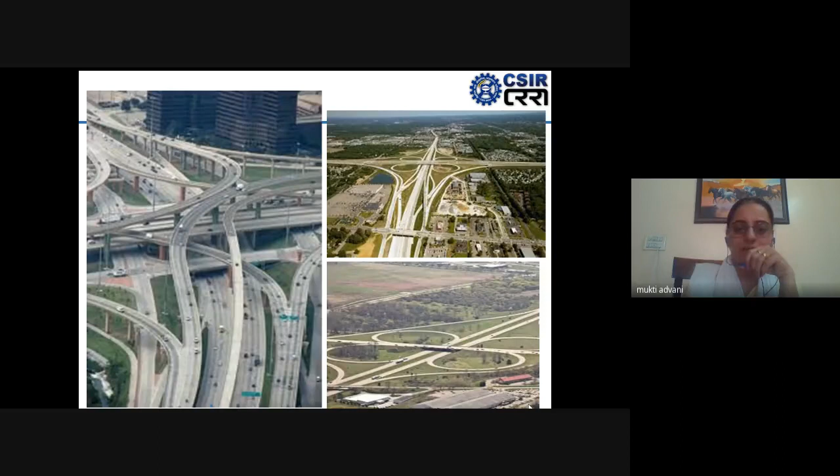In many countries, they have created additional space for additional numbers of different types of vehicles, or even they have majorly cars and all kinds of vehicles. If they had no enough space, they have created space by building this kind of infrastructure. But again, they are also having the same problem of congestion.

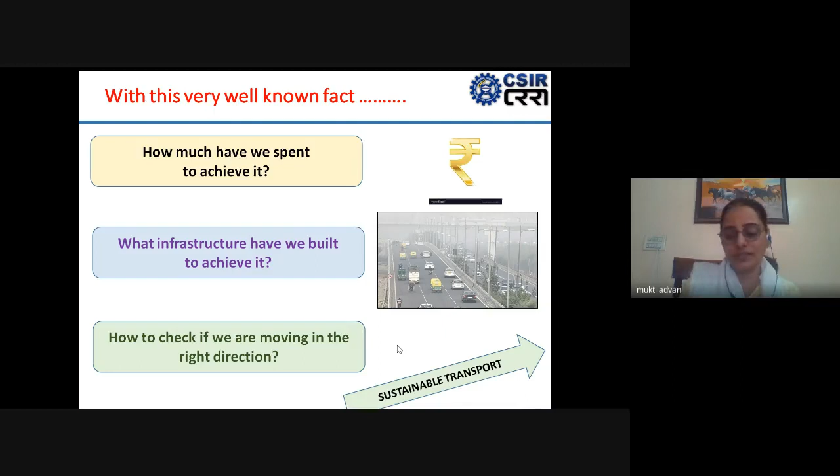With respect to budget, this data is all for the city of Delhi. If we see how, over the last few years, we have spent money in the name of achieving sustainable transport, mostly all kinds of projects are either the construction of new highways, new widening of roads, new flyovers, new elevated roads, or underpasses, and so on. Mostly, since years, we feel proud of having more and more flyovers in our city.

The AIIMS flyover of Delhi is very well known, featured in movies and everywhere. When we show a flyover where so many cars are moving in different directions smoothly, without any obstruction, we feel some kind of pride. Still, to be honest, a politician is very happy to inaugurate a flyover, but we miss that just at the end of these flyovers, we do have congestion.

We have seen in Delhi also, or otherwise in many cities, suppose there is a signalized intersection, or maybe initially an unsignalized intersection where we do not have much traffic. Then because of increased traffic, we introduce a signalized intersection, we introduce signal control. After a few years, when this signalized intersection starts getting more and more congestion, more and more delay, then a flyover comes up. When a flyover is constructed at this particular place, for a couple of years it will work very fine, it will reduce the delay for almost all vehicles. And after again a couple of years, we have seen almost each and every flyover itself gets congested.

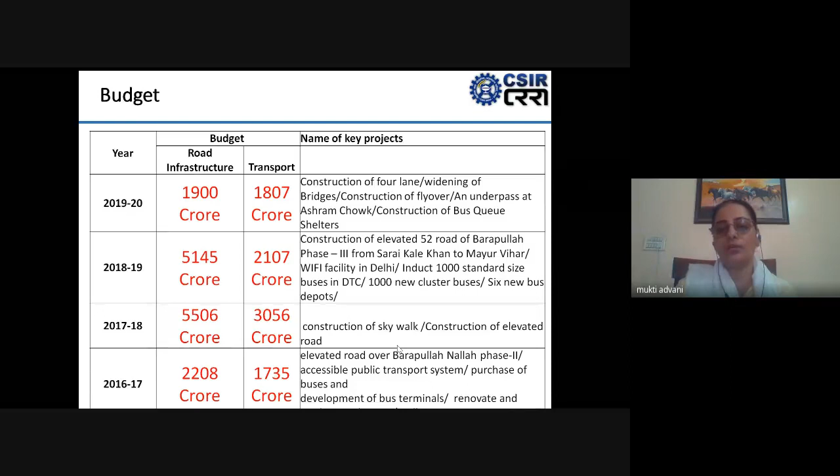That means we have reached back to the initial stage of congestion without flyover, with a signalized intersection. So maybe flyover is not a solution. It's either a temporary solution, or it shifts the problem. Sometimes in terms of time, it delays the congestion level by a couple of years, sometimes 4 or 5 years, and sometimes it shifts the problem in terms of location.

Apart from these flyovers, we sometimes construct footover bridges to reduce the delay of vehicular traffic on one particular road. Whenever we introduce footover bridges, sometimes in the name of reduced delay, or sometimes in the name of safety, we should rethink whether we are really supporting the pedestrians, the sustainable mode, or are we supporting the cars and two-wheelers?

If on a road there is some traffic jam or delay, which is again primarily for cars and two-wheelers, and if we are constructing a footover bridge, we are asking the sustainable mode, that is the pedestrians, to put extra effort for crossing the same road. At the same time, we are reducing the delay for cars, two-wheelers, and of course a few buses. We should rethink whether the infrastructure we are providing is really in favor of sustainability or not.

Sometimes we add these elevated corridors, signal-free corridors, and so many things, just by saying that it will reduce the delay. But we sometimes don't know that this reduced delay is for private vehicles. It's not for sustainable modes.

So to my understanding, let the personalized vehicle wait without compromise. If you are able to reduce the delay of a car without compromising the needs of a pedestrian, it's excellent. But by compromising the level of service to the pedestrian or cyclist or other non-motorized modes, if we are improving the delay of cars, maybe we are not actually moving in the right direction of sustainable transport.

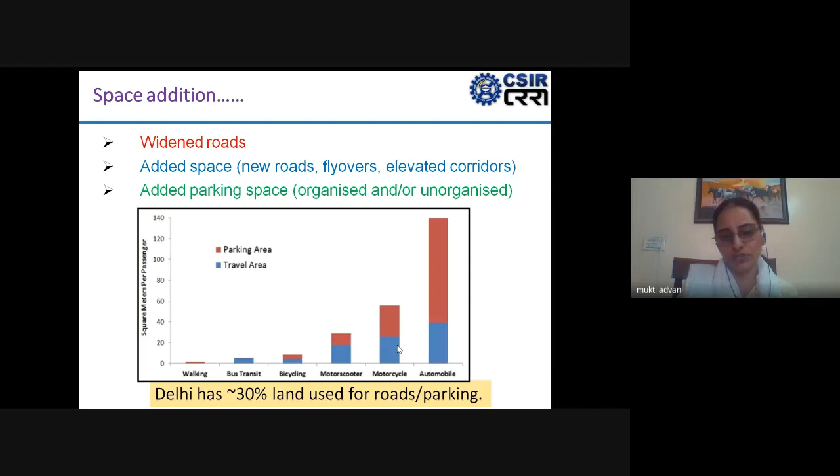Even if I don't consider that space outside our houses where we park our cars, even if I ignore that major section, one third of its area, around 30% of the Delhi area, is already being provided for just vehicles, whether road or parking. So we really need to think about how much space we should keep adding to accommodate vehicles.

This is one of my favorite slides. This conveys that the burden, or the negative part of transport, basically lies with cars, or in other words, personalized vehicles—it can be car or two-wheeler. With respect to space, with respect to traffic congestion, with respect to even accidents, because if two cars hit each other, there is a chance of a fatal accident.

But if two bicycles hit each other, there is hardly any chance that the person will die, unless there are some very physical limitations. So all the negative part is being created or produced by cars and two-wheelers, but all this burden of negativity in terms of congestion, in terms of accidents, and in terms of pollution, which is a major issue in Delhi, all this is created by personalized vehicles and kept on the shoulder of non-motorized vehicle users.

A person who's walking, or using a cycle or cycle rickshaw in case of northern India, all these are facing the same level of pollution which they have never contributed to. So we need to rethink what we can do, how we can correct this direction, because at present the way we are adding space, we are definitely promoting personalized vehicles and not at all sustainable transport.

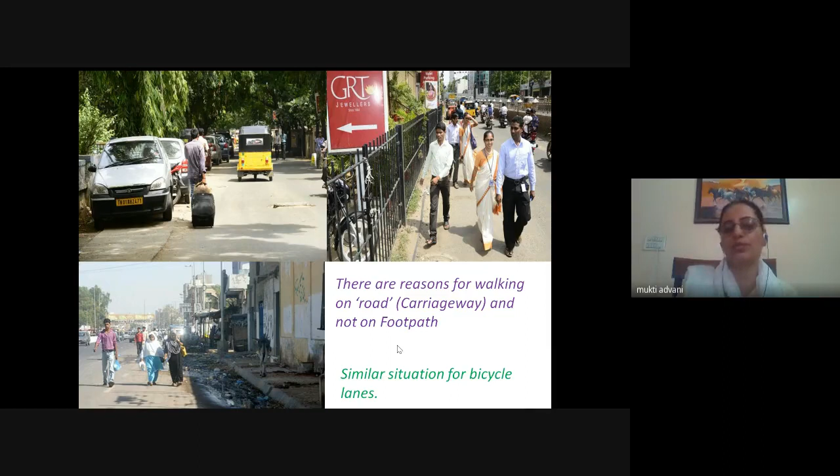And it's not undoable. It can be done. There are many projects by many different organizations who have done this. We can have footpaths, footpath space, multi-utility zones, and so on.

But whenever these aspects are discussed, a major concern raised is that we don't have space. In Delhi you have wider roads, but in other cities we don't have wider roads. If we don't have wider roads, we need to know that we have limited space—so what is our priority?

Can we have a road without a car lane? We have so many roads with long distances where we don't have footpaths, because we decided our priority is cars—that the road is for cars, and if there's additional space, you can have a footpath or a bicycle lane. But maybe we need to rethink this.

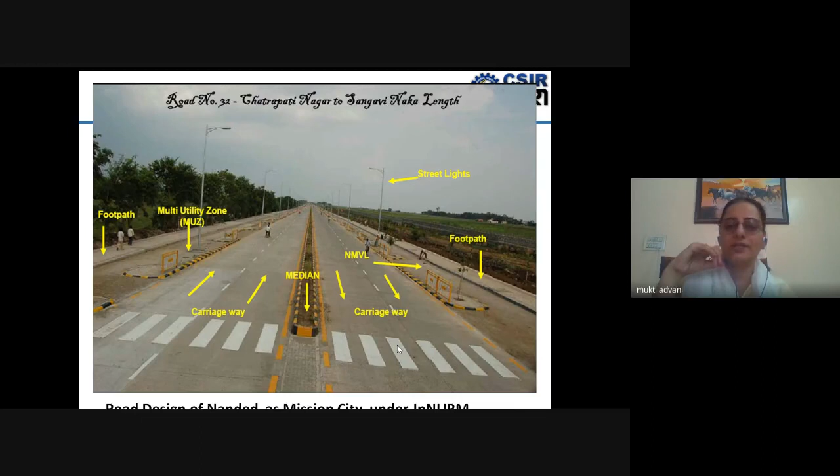While designing our roads, we can start from the extreme ends. Let's have a footpath first, then a bicycle lane, and if space remains, add a car lane. If not, let it be that way.

If I'm stuck in congestion sitting in one of these cars, I'll definitely think, 'kash mein aaj bus mein aaya hota' (I wish I had taken the bus today). So if the bus is moving faster than cars, I think that infrastructure is perfectly fine—that is towards sustainability. But unfortunately, if the bus isn't moving faster than the car, my choice will definitely be the car.

So we need to reduce the speed of cars. We need to improve facilities for buses at bus stops and while moving, in all aspects. I think this is all for the given time—I should stop here, or do I have more time?

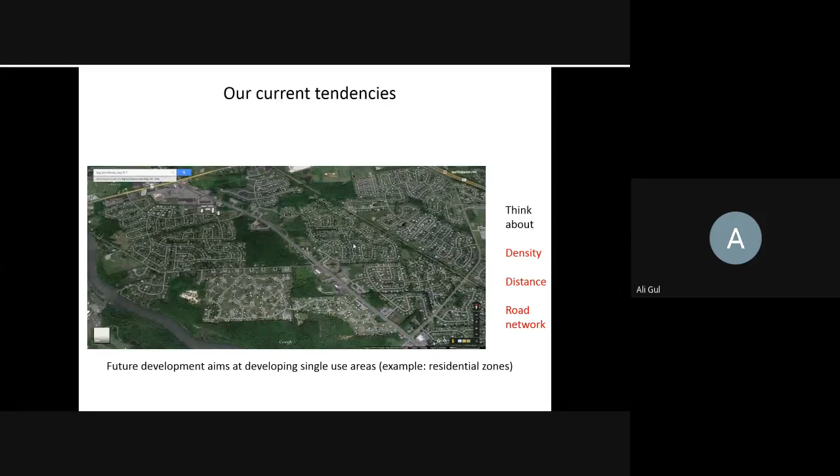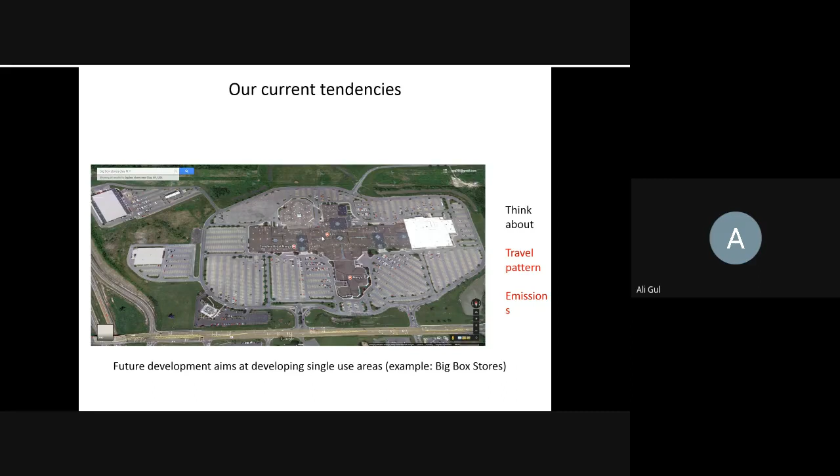So when we plan for these types of things, the result is these very large box-type stores, or very large malls, which become the solution for shopping, with a lot of space dedicated to parking, as we can see. The result is that people become more and more car based, and this is the outcome of this type of planning. So planning and transportation are very much related to each other.

As Dr. Advani was saying, building more capacity is not the solution—we've seen it fail in Western countries also. So we should try to avoid this type of thing in our developing part of the world.

What were our historical trends before we went on this sort of crazy urban planning spree? We used to build cities with very much connected spaces—for example, this grid pattern for my city where I live, Kyoto, which is a very old city, and we can see it's very nice and provides a lot of connectivity. We also used to live in mixed-use neighborhoods where all our support systems—shopping, residence, schools, even some workspaces—were very near to us.

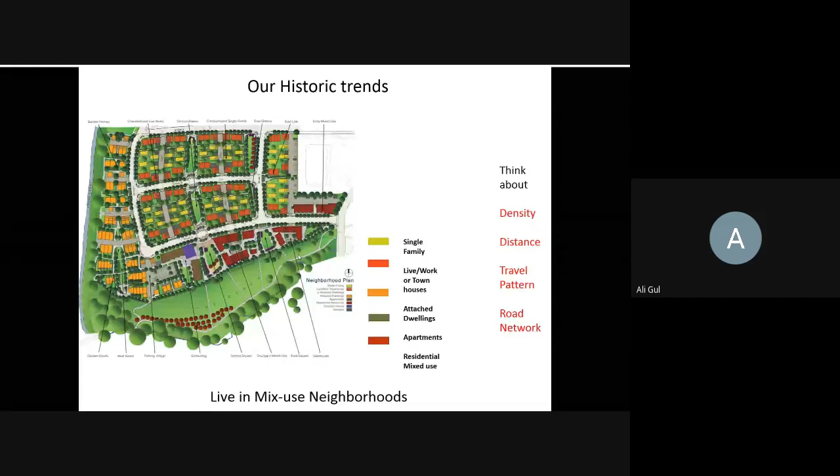So I think our future possibilities are also connected with this type of historical living. We have to go back to our neighborhood-style living and try to connect our neighborhoods with transit-oriented development, which, as I mentioned, was touched on by Dr. Jit Kumar in the previous seminar.

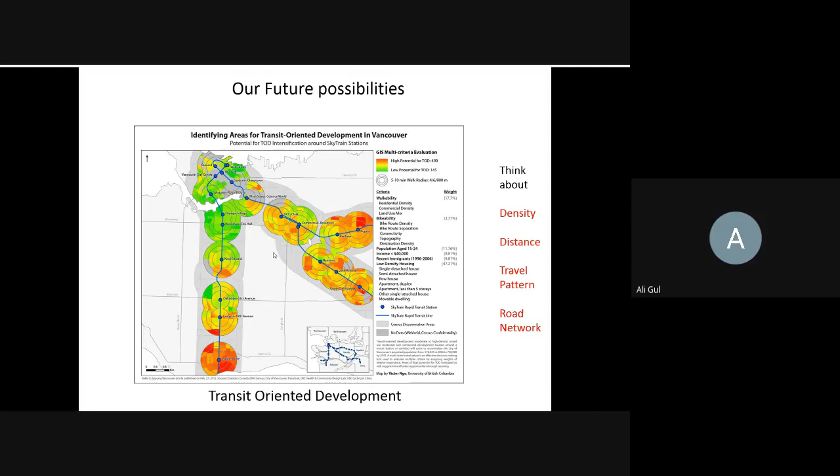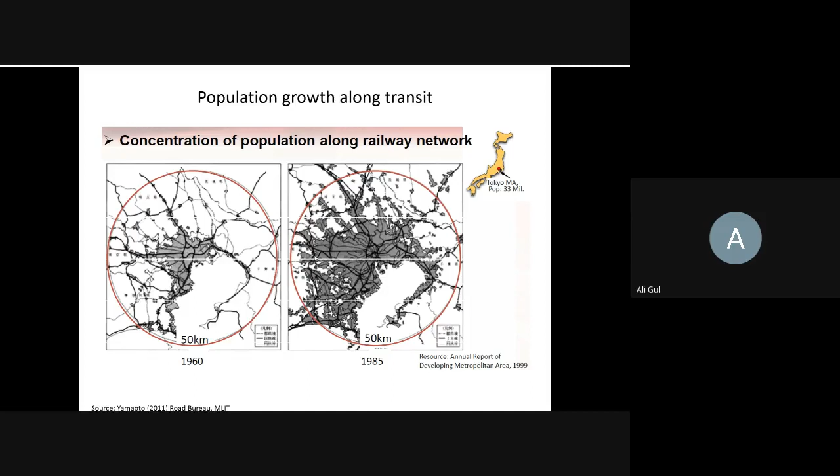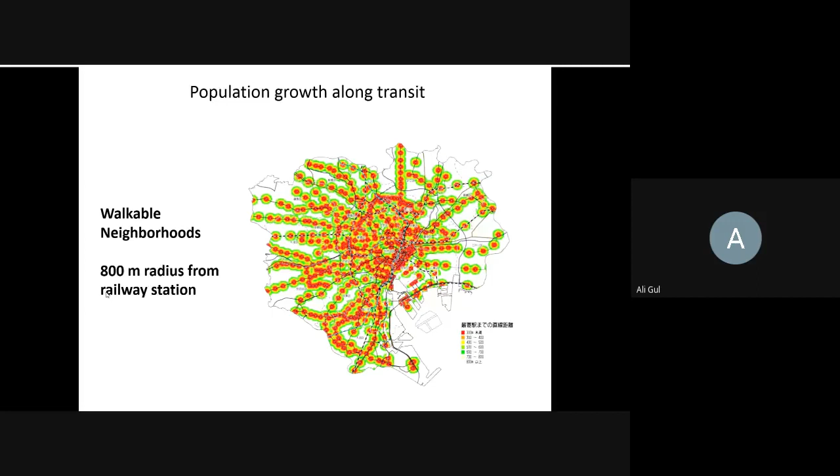Most cities that are seen or thought of as more sustainable have followed the same growth pattern. This slide shows the concentration of population along the railway network in Tokyo. From 1960 to 1985 and even further, the major growth is along the railway lines, shown by these dark lines. They have developed so much that you can basically travel to any part of Tokyo on this network, and walk around, because within an 800 meter radius from the railway, you can be connected to every part of the city.

This is another way we can see how Tokyo is connected through this sustainable mode of railways. The bus network is on top of it, which also increases connectivity and accessibility compared to other aspects of transport.

One of the major successes of these railway companies and this railway-based commuting system in Japan is that many railway companies do not only earn revenue from the railway business, but also earn a lot of revenue from connected businesses which they run very near to their stations, in the station, and in the surrounding area of a station. It is developed by those railway companies so that they can not only connect that area but also keep providing transport services for that area. So real estate and other businesses are also linked with that.

I think when we try to bring these concepts from developed countries to our countries, we should also try to bring the attached concepts. For example, give more and more leverage to these companies to develop areas surrounding stations to get more transit-oriented developments over there.

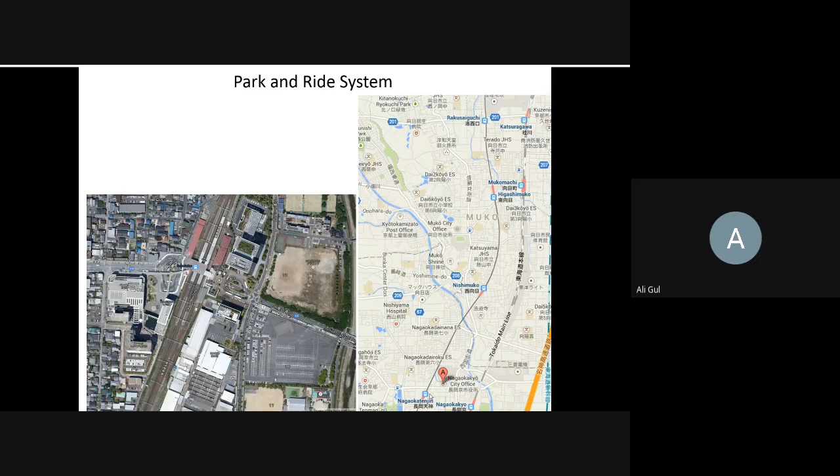Another very good aspect with this development along the railway lines is that the companies are also providing a lot of space for park and ride systems. For example, this line which goes very near to my home in our city has two very big park and ride systems - one at Katsuragawa station, and the other at Nagaoka Tenjin station.

They also provide a lot of space for bicycle parking. This was another thing Dr. Advani was mentioning, that people are traveling towards stations with bicycles and we don't have enough infrastructure for them. This is also very much handled by these companies - they can sense who their users are, and then provide infrastructure related to them. Of course, there are some spaces for cars as well.

On the whole, for sustainable transport on the passenger side, I think this slide gives a very nice perspective on where we should go. This is a sort of aim and objective of the Sydney Alliance. They want to create public transport coverage for Sydney City, moving from the right-hand figure to the left-hand figure, by providing public transport available for almost all people within 400 meters of their residence or destination, with a very high frequency of 15 minutes, where you can travel on different modes of public transport with one ticket, and the public transport itself is safe, clean, affordable, and accessible.

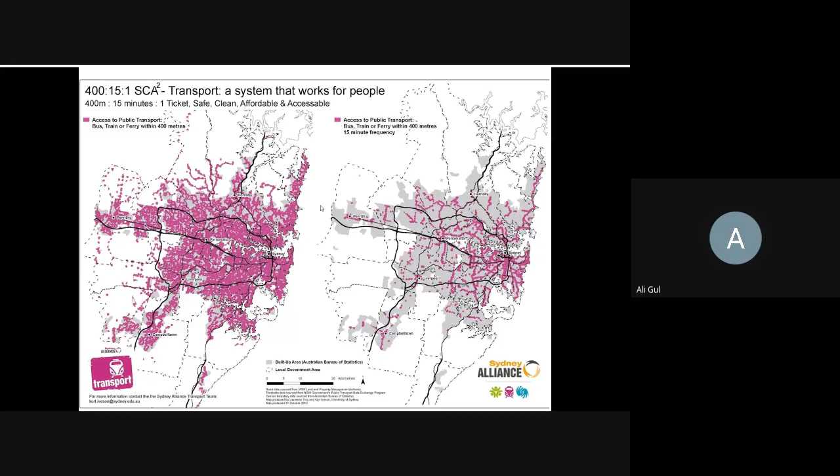At this stage, I will try to shift my focus to a different type of transport which is also very important for cities and the overall country - the movement of goods. I think Dr. Jit Kumar will also give us more information about passenger transport. As Dr. Advani has already discussed a lot about people's transport, I think it's good to get some share of goods movement also in the sustainable development or sustainable transport modes.

It may be a strange fact that urban freight is increasing, and its role is also increasing in developing cities, developing countries, and also in developed cities. For example, this slide, which I usually show with many participants, tends to shock them a little bit.

These are the number of customers per day that visit convenience stores in Japan, and this is only for one store, 7-Eleven. If we combine all convenience stores, it's about 37.5 million per day - I think that's the population of Delhi nowadays. So if you think that many people are visiting convenience stores, there is huge demand for refilling these stores, because they have only very small selling space.

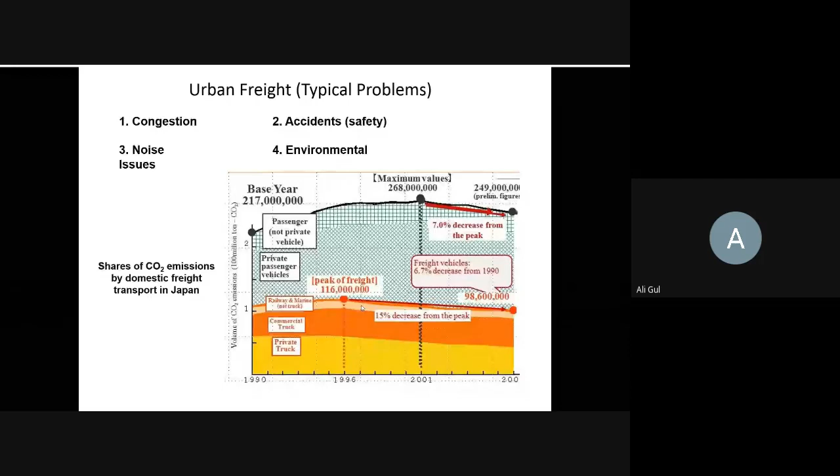So we have this small branch of logistics which we call city logistics, where we try to discuss these types of urban freight problems from the perspective of both public and private sector costs. Not only cost-wise, but also from the environment, energy use, and traffic congestion aspect. So today I will be talking about one of the measures, one of the systems that we try to propose, to see how they can solve this type of urban freight problem.

The system is called urban consolidation centers. Let me give you a very simple definition of urban consolidation centers and what they do. The main objective is to combine or consolidate the supplies for different customers, which are being ordered either by the same company, like for example 7-Elevens or big shopping malls. They order a lot of things from different suppliers. So instead of these different suppliers each going to serve that particular area, customer, or location, we try to combine or consolidate the goods into one single big package, and that package is delivered by just one company or one truck. So we can reduce the number of trucks in the city as a whole.

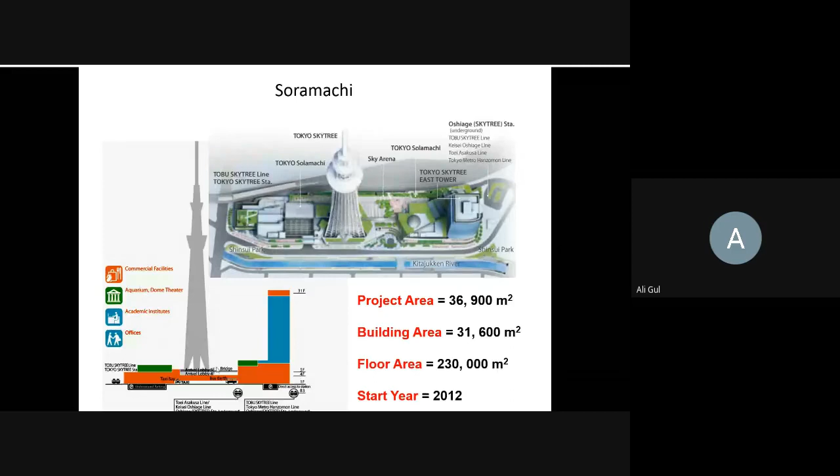It's a smaller area, not so big from the perspective of a city like Tokyo. But the important thing is the number of people visiting this place. This place is mainly for shopping and sightseeing, to see this nice tower and the city views from the top. But it also provides office spaces, maybe academic institutes, some commercial facilities, and maybe some residents too. The number of people visiting this place is around 120,000 every day, and all these people are there to do shopping, enjoy restaurants, or other types of things.

So I think the demand for refilling or inventory restocking is very huge, and this project can actually be a benchmark from this perspective as well, since it is located at the hub of 3 different subway lines. So it is very well connected with public transport, so passenger transport is no problem. Even if 120,000 people are coming, there is enough capacity, and this is a very nice type of TOD where you can combine your development with transport setup.

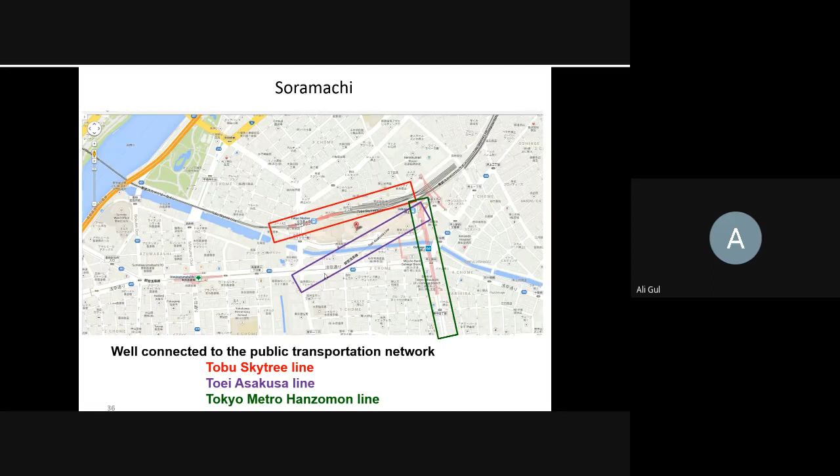But if we see its surroundings, how this particular project is located, you can see that all the other area is very densely developed and quite low in terms of the height of the buildings.

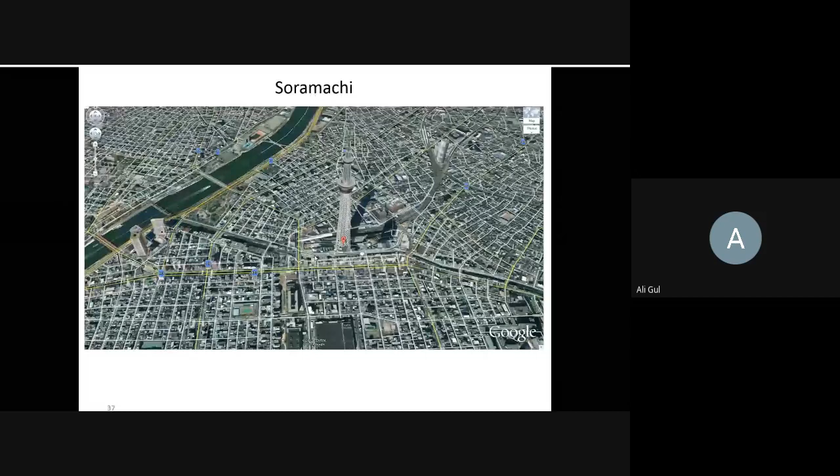The surrounding roads are also very small, and I think they cannot handle the amount of surface traffic, even for passengers, let alone freight. We can see many streets leading to the project area are very small, and it will be impossible to run a lot of truck traffic on them. So what people are now thinking is that they consider these logistics and freight problems from the beginning, integrating them into the initial planning of the facilities.

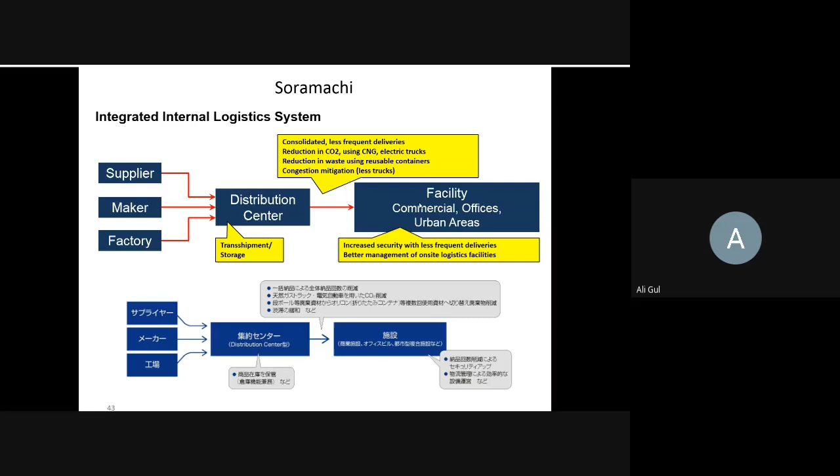So here they have planned an integrated logistics system. How does it work? It works on a similar concept to an urban consolidation center or distribution center, where suppliers of goods to the final facility need to go through this particular center, and then the consolidated goods are shifted using more environmentally friendly vehicles to different places within the project.

For example, 80 trucks per day go to the Kawaguchi urban consolidation center instead of Soramachi. Similarly, other trucks like 200 and 100 go to other centers. Still, some trucks - 430 per day - are required to visit this place for other inventory replenishment. So instead of 800-something trucks, we are just having only 430 trucks going here.

Surprisingly, the amount of deliveries from the remaining 380 trucks can be fitted into just 5 trucks. So you can see that these 380 trucks can be replaced by just only 5 trucks. So the overall traffic situation and overall parking situation in this particular area will be much improved.

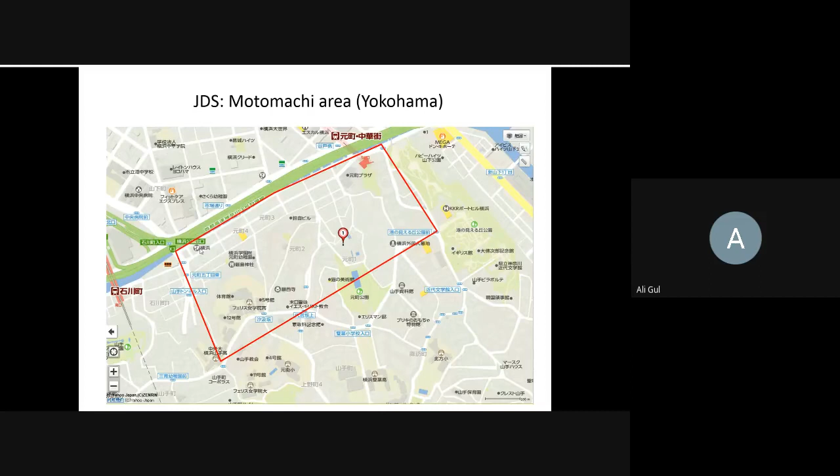This city street is a very commercial street, and to improve the environmental condition, they avoid having multiple trucks servicing this area. Instead, they consolidate goods in a separate place and send them by one truck which is environmentally friendly, using natural gas.

So the environment on the street, the shopping street, improved a lot. Not many trucks move in this very congested part, which we often see in our small bazaars or shopping areas that are already congested, with a lot of freight vehicles moving in. So the environment becomes very good. Still some cars are there, but no truck traffic.

Instead of parking here, these trucks, which are only a few in number, maybe 2 or 3, park in a parallel street that is not the shopping street, and deliveries are done with push carts. So consolidated deliveries, one delivery per shop, are done this way. A lot of benefit is achieved in terms of vehicle reduction and environment. This urban consolidation center is a little bit far from there.

I think the time is also running out, so maybe I'll go very quickly through this last slide, and there's another example related to this, so maybe we can skip that.

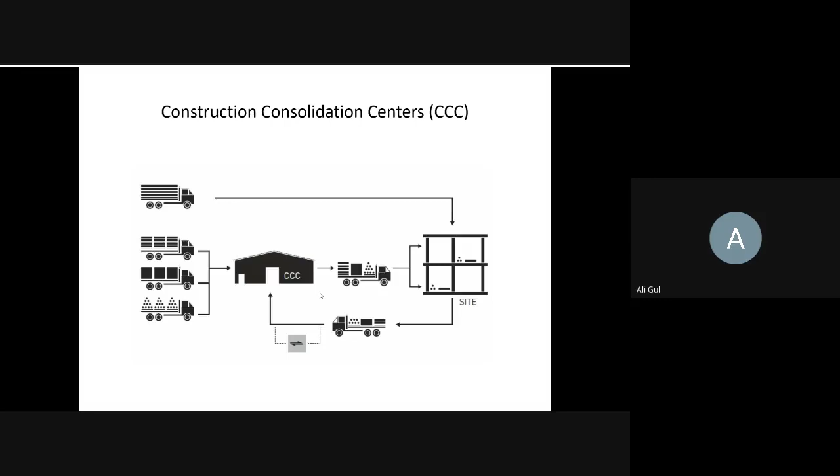This concept is the same as a consolidation center, but not for shopping or parcel delivery, rather for construction material delivery. This concept was also tested in London, to construct very big projects there.

So what they did is construct a construction consolidation center 2 miles off this area. Instead of different suppliers going directly to the project area, they deliver everything at this consolidation center where it's stored, then transferred to the project area daily based on how much is needed. Some waste material or unused material can be recycled or sent back to this area.

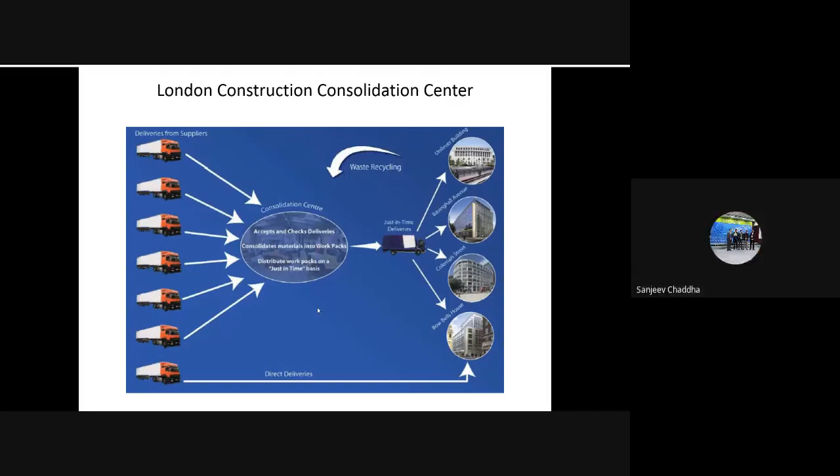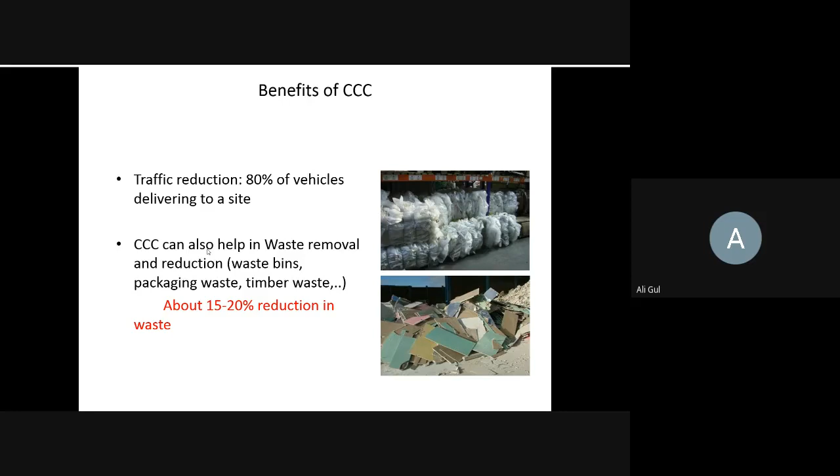Instead of using many trucks, they use just 5 trucks, and it helped in traffic reduction - about 80% of the vehicles that were supposed to go directly to the area were reduced. It also helped in waste reduction, because waste can be collected and sent back to only one place instead of collecting and separating waste for every supplier.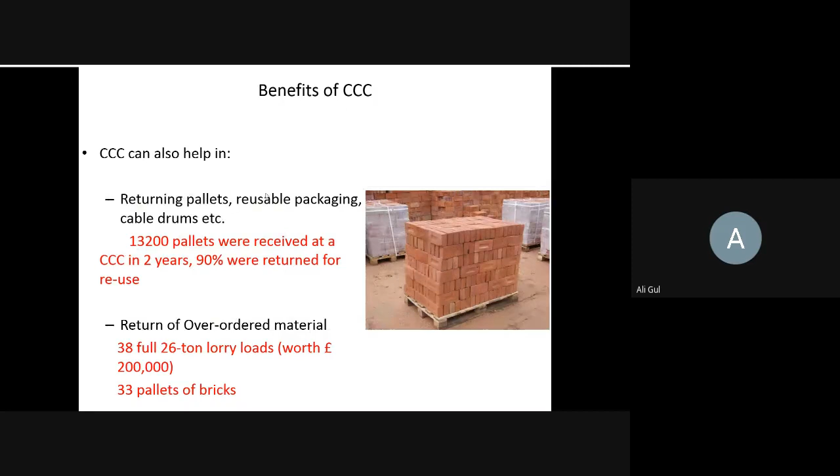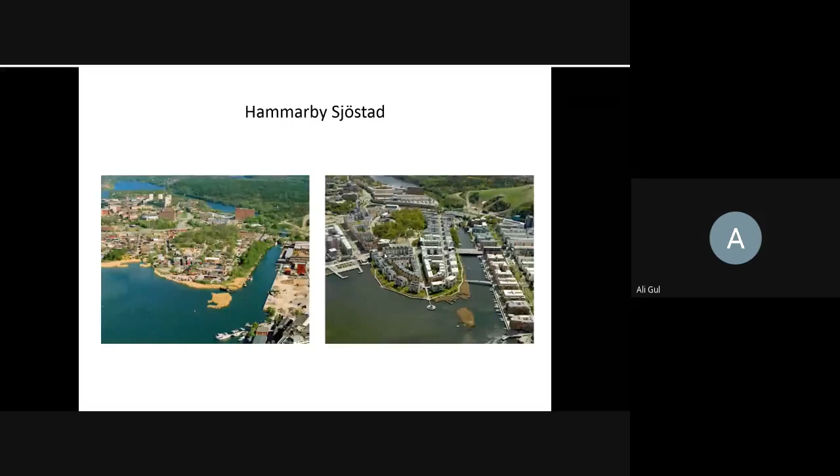So I'll stop here, because the next topic I wanted to share was about the Hammarby area. I think this is also one of the iconic places for sustainable urban development that many people cite. While constructing this beautiful place, they also installed a construction consolidation center outside it, and the savings were very significant.

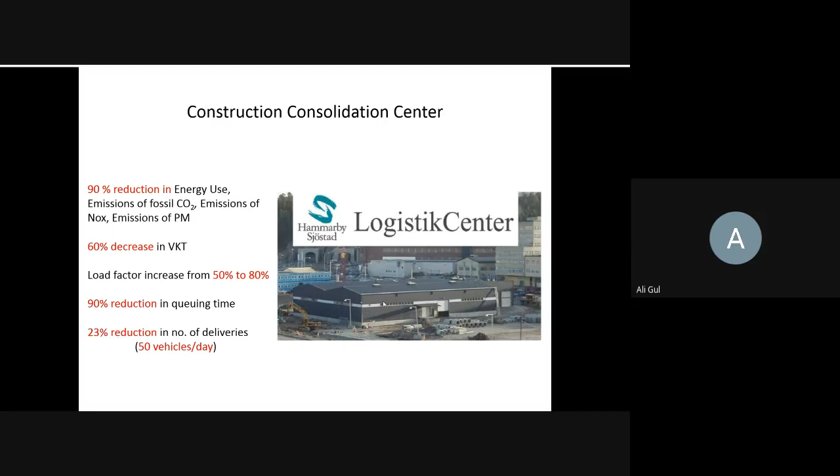The other thing I wanted to share about the same area, near Stockholm, close to Hammarby town, is how they tried to handle the logistics situation in very dense and narrow street urban centers.

I think these are also very common in our part of the world, where the streets are so small and congested that even allowing all of the suppliers to bring their stuff and distribute to these small shops is a big nuisance for us. So what they did is construct a small urban consolidation center outside, and for very small shops and narrow streets, they tried to use a sort of public transport system for urban freight delivery. They collected from all these different freight carriers or suppliers, and then ran stop by stop delivering to all of them.

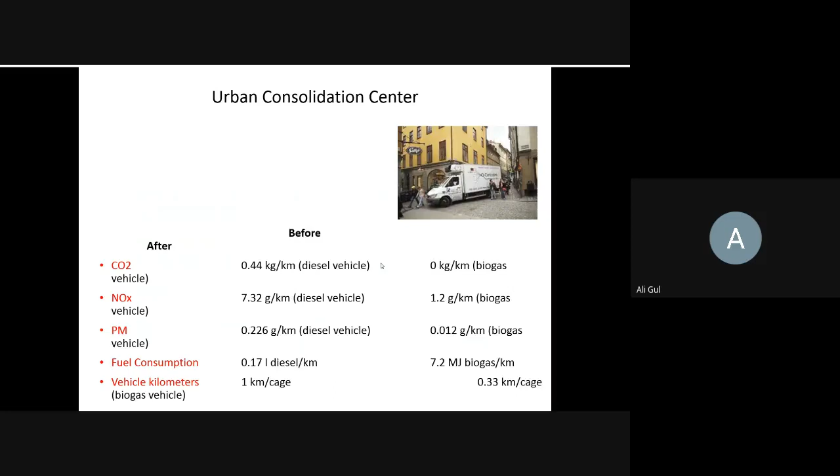All right, this was my talk. I think the conclusions are very general, so everybody understands them. Sustainable transport is linked with sustainable urban regional planning. We have to focus more on accessibility rather than mobility itself, and transport demand management is the key to achieve this. But we also need a holistic approach which includes freight transport, because most of us neglect freight transport in planning and in government policy making, especially for cities, because most freight transport in the city lies in the private sector. But the private sector is easy to convince, and we can do this project-based, as I've shown with small projects, where you can convince just the supplier or the developer of a particular area to achieve this small but valuable contribution towards sustainability. Thank you very much.

I think I took a lot of time. I'm very sorry for the mishaps also. Maybe I will be prepared better for the next time. Thank you.

Thank you, Dr. Ali, for sharing such wonderful information, especially about freight transport. Because generally when we talk about transport, we talk about passenger transport and not goods or freight transport. You made us aware about all this, and don't worry, we have a very dedicated audience wherein 5-10 minutes extra here and there will not count. But now I was thinking you had so much to share - maybe in future we can have a dedicated talk on each of the case studies you did, the wonderful case studies of Soramachi, Shinjuku, Motomachi, and even London, and certainly some case studies which you wanted to cover but had to rush through.

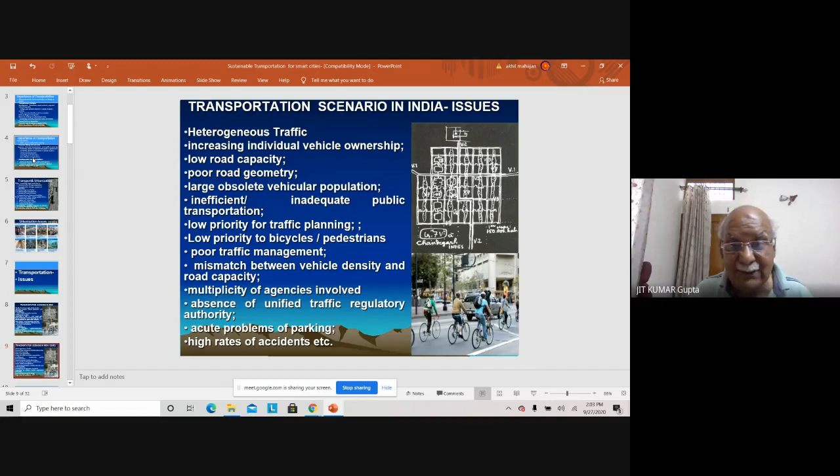Roads have never been designed. There are no planners available, and the city plans are not designed based on the traffic and transportation network. So there is an inefficient system of public transportation. We have low priority given to the planning of traffic and transportation, and that's the reason entire city system of travel is getting into a mess.

This is the way these images have been shown - the way Indian roads are being used. It is used, misused, or abused. You can see it's free for all, it's heterogeneous traffic. You can see how the public transport works, what the road conditions are, the kind of pollution being generated, the accidents taking place. Roads are being used as parking space, and very limited space is being made available for mobility of the vehicle itself.

I think we have to look for options on how we can make this traffic and transportation more rationalized. I think a city, a human being has four functions to perform: living, working, care of body and spirit, and circulation. That means a city, if it takes care of these four functions - I'm trying to emphasize the role of planning, because unless and until cities are planned to take care of the traffic blues, the cities' travel can never be rationalized.

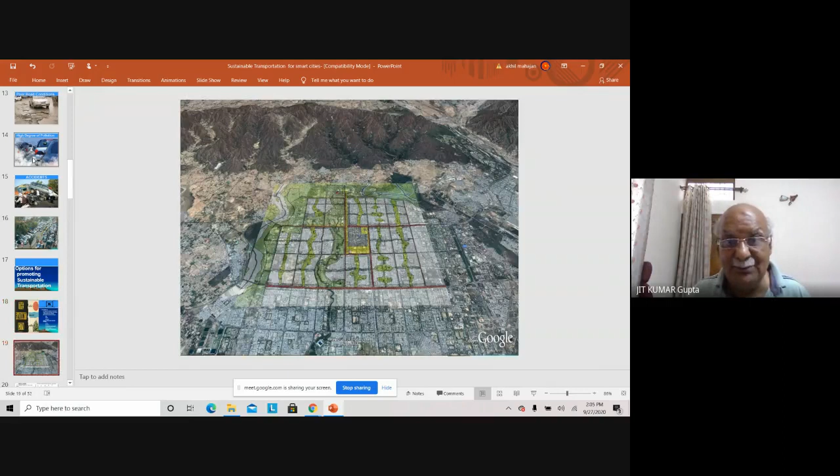But Chandigarh, once Corbusier looked at the city, they found a large number of people using two-wheelers. So ultimately he amended that rule of 7 V's to go into the V8, that is bicycle, and that's what - this rule of 7 was amended to V8 for taking care of the bicycles and two-wheelers.

But I don't say Chandigarh represents one of the finest examples, for the simple reason the grid iron pattern is the worst kind of traffic management instrument as a planning shape. You can see they are very simple - it makes optimum utilization of land, but there is no shortcut. If you go from one end to another, you will all be traveling around these roads which are straight roads.

Wherever in the world grid iron pattern has been followed, it has been superimposed by diagonals, so that there are shortcuts. All major cities of the world which have gone for grid iron pattern have a superimposed diagonal for minimizing the traffic, which has not been done in case of Chandigarh. And that's what - it remains one of the cities in crisis for traffic and transportation, despite it being planned as the best planned city in the world.

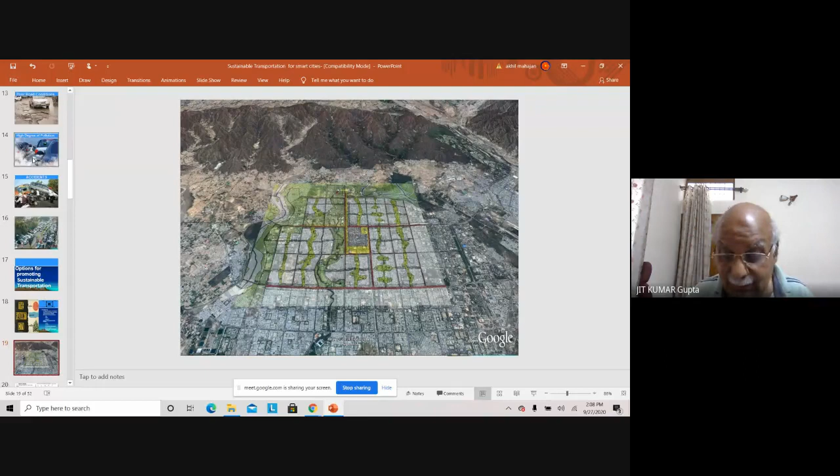Secondly, Chandigarh followed a system of pure land use planning, residential, commercial, industrial - they are segregated. So therefore, you have no option but to travel from one end to another. These two remain the problem of the city. By this, Chandigarh is in perpetual road crisis.

I was explaining to you this system of 7 V's, this is the Chandigarh master plan. Chandigarh did one of the finest things when they divided the city into sectors, and each sector is about 1 square kilometer, 800 meters by 1200 meters, and this size was fixed keeping in view the human scale - that means 10 minutes walking from any corner, you come to the center of this place.

So this size was fixed, and Corbusier wanted that within these 4 walls of a sector, which is 1 square kilometer, a child till the age of 16 should not need to come out. That means this will be a self-contained sector in which all your needs of living, education, healthcare, and day-to-day shopping etc. are all met within this.

But unfortunately, when they did the detailing, they put all the shopping street right on the V4 itself. That means you have no option but to come to this V4 for all your basic needs. Had they rationalized the total system of distributing convenient shopping at different places, things would have been much better. Plotted development remains another kind of tragedy.

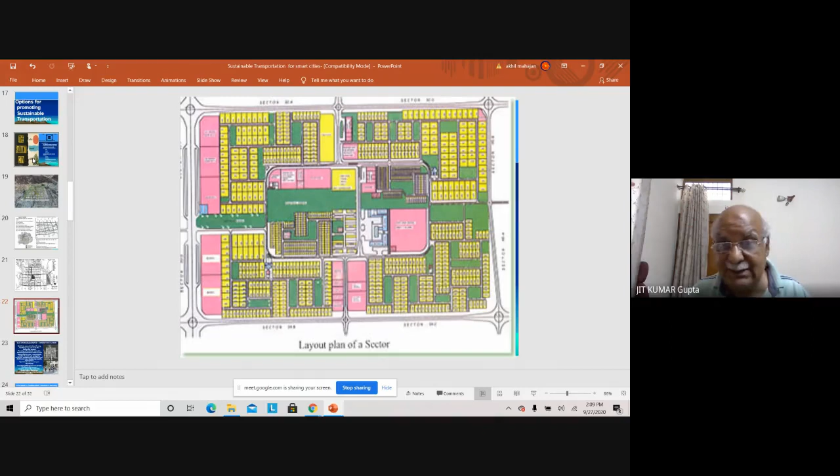Plotted development promotes more circulation. If we go for flatted development, we have more chances and more possibility of making the city and the communities self-contained. So I think if we have to rationalize our planning, development, and transportation, we have to re-look at the planning.

That's what Ali Sahab was saying, and so was Madam Adani talking about. So we will have to redefine our approach to urban planning. We have to see what should be the optimum size of a city. A city beyond metropolis is always in crisis and will remain in crisis, and it's very difficult to make the transportation rational.

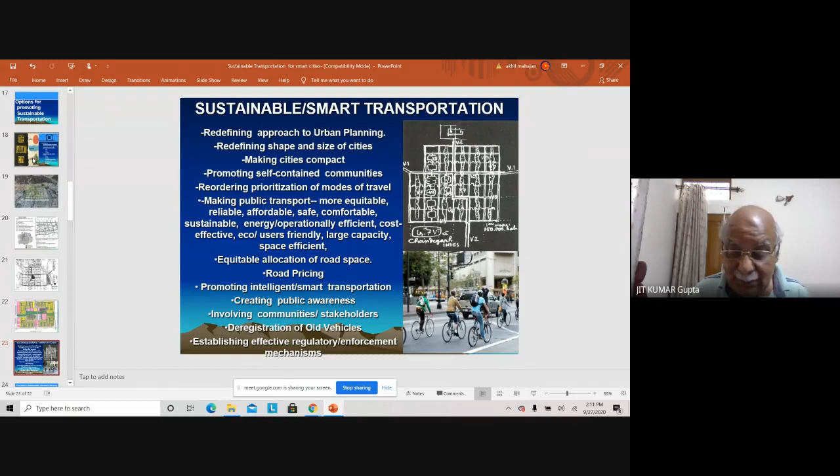We have to stop melting the city. We have to make cities compact, create self-contained communities, and reorder our priority of planning. We have to make public transport more equitable and more efficient, and we will have to see how people are allowed to use road space - it is not free for all. We also need to see how many vehicles need to be inducted depending upon capacity, and what is the regulatory mechanism for managing traffic and vehicles.

So ultimately, I think our planning for the city will have to be changed. I said earlier and I'll repeat now - our planning priority shall be promoting accessibility, not mobility. You don't have to make people move, you have to make things accessible wherever they are. You have to plan for people and not for vehicles. You have to move people, not cars, and you have to keep space for walking.

We are saying cycling and walking is the preferred mode, but we have to redesign the places for walking and cycling. We have to reduce our travel demand and reorder land use planning. We will have to see that workplaces are created within the sector itself, and the sector becomes centric for all your needs of working and living.

In fact, majority of the problem in Chandigarh is because people are going from one part to another for school. But in other countries, it is mandatory for children till 10th standard to study in the same area, in the same school, within the community itself. So therefore, I think that is where we need to rationalize.

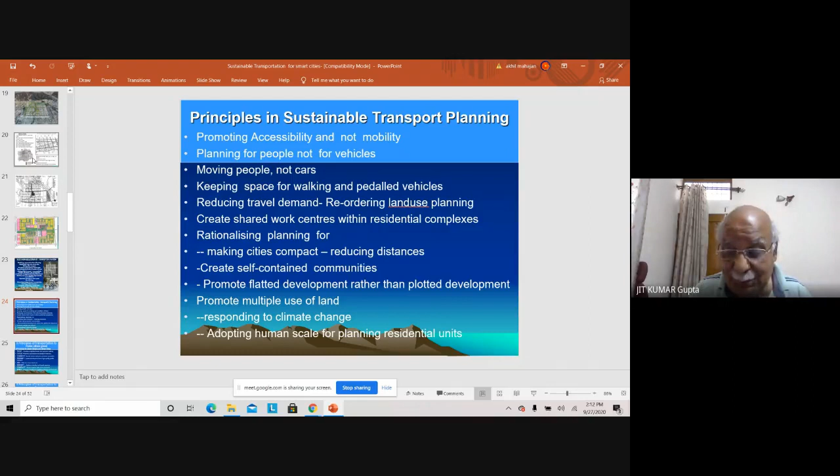So if we make our cities more compact, we reduce distance and may create more community spaces. We also have to make sure land is used 24/7, rather than having two schools - there can be one school running in the morning and another in the evening. The playground can be used by multiple people, and that will help rationalize the traffic.

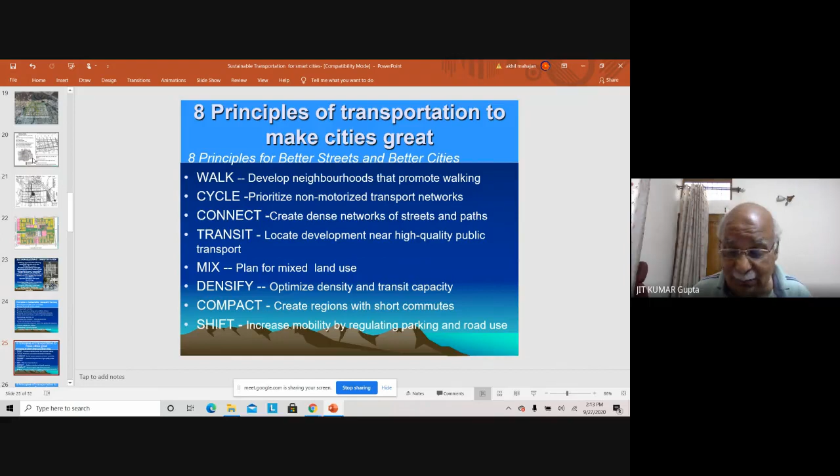I think there are 8 principles to follow - walking, cycling, connecting transport, mixed land use, and then we have more density, make the city more compact, and shift people from personalized to public transport. That would be the option. I said, when you plan for people rather than vehicles, I think your priorities will change.

It will not be wider roads, it will be more walking. Those pavements will be more safe. When we plan the city, unfortunately, we never keep in mind what it's going to expand into tomorrow. Trees are put in such a manner that whenever there is expansion, either the tree will come in your footpath, or your electric pole will come there, or you find there is a service network supplying sewerage or sanitation running there, and you have to cut trees.

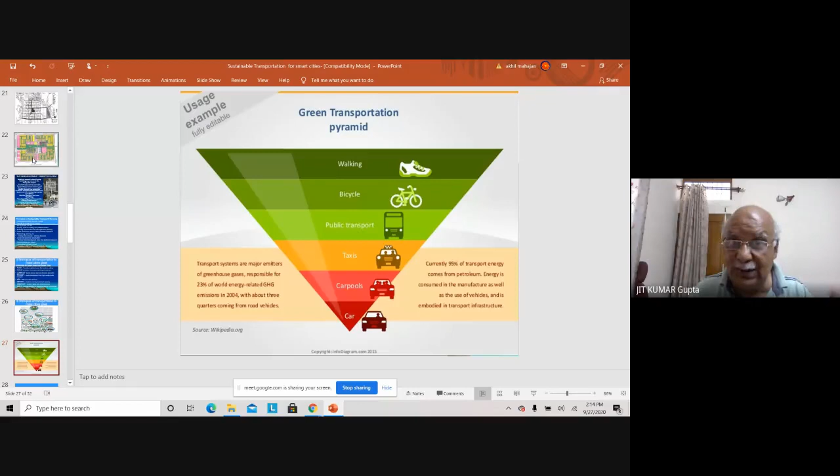This needs to be looked at, that when you plan, you holistically plan for what roads are ultimately going to be developed. You can do it in phases, but surely that will not involve cutting trees, it will not involve electric poles coming within your footpath, and manholes being scattered everywhere. So I think we have to reprioritize our planning, and if you give priority to human beings, things will improve very quickly.

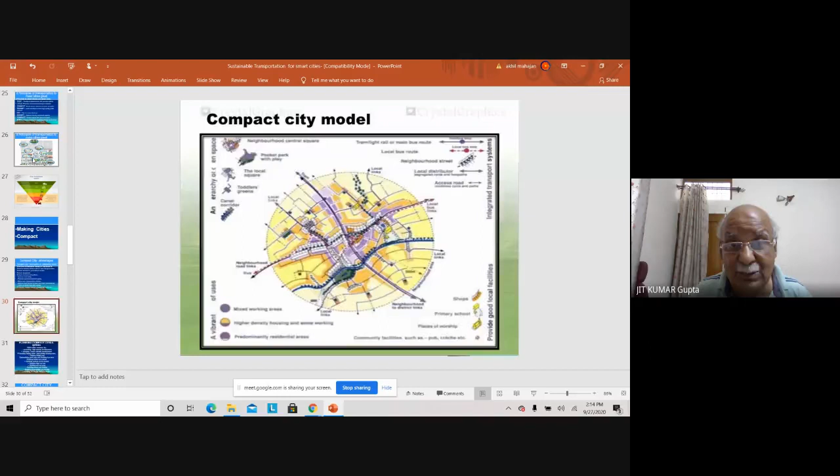When we say we make cities very compact, a compact city has distinct advantages: it reduces the gap between place of work and place of living, reduces the number of personal vehicles, reduces congestion and pollution, makes roads safe, promotes pedestrianization and cycling, and makes public mass transportation effective. So making a city compact is one option, and there are a number of ways to achieve this.

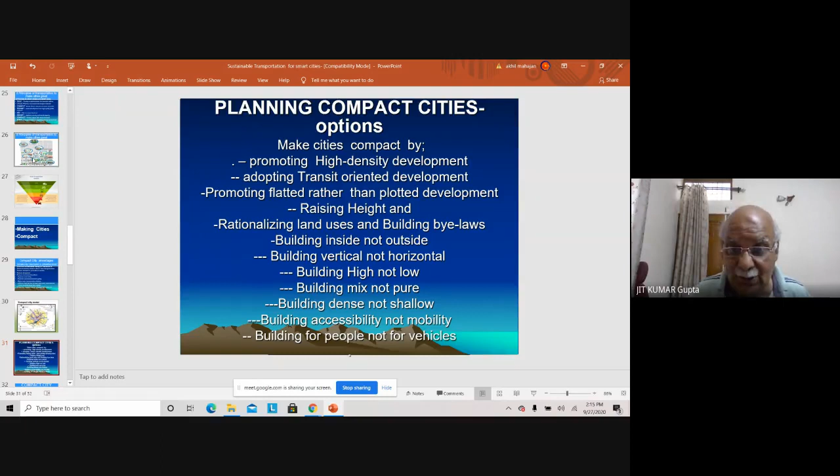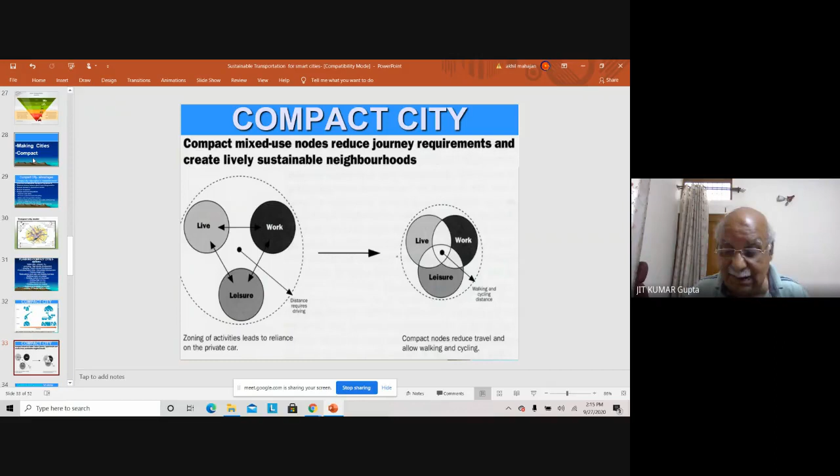Look at the density, look at the TOD system—your transportation network should be guiding your development, rather than your development guiding the transportation network. Go for flatted development rather than plotted development, raise heights, look at land uses and building bylaws. You have to build inside the city, not outside. You have to build vertical, not horizontal. You have to build high, not low—these are the options available. You have to look for density, minimize distances, and promote diversity, and mixed land use remains the option to make cities this way.

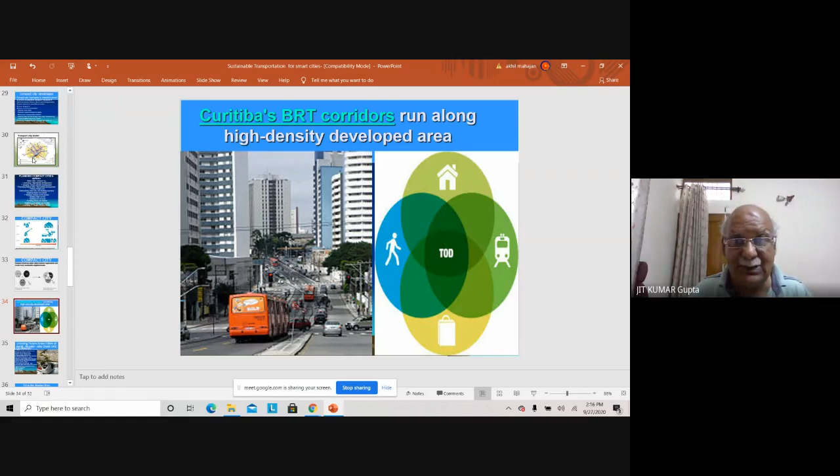There are cities like Abu Dhabi's Masdar City—it is a zero car, zero waste, and zero carbon city. Cars are not allowed to go inside, but you come from outside and park your vehicle, or come by public transport, and within the city there are pods taking you around, and wherever you get down, you don't have to walk more than 200 meters.

In India also, there's Matheran, about 40 kilometers from Bombay. It's a hill station where you are not allowed to take any car inside. You have to park your vehicle outside and then walk down, or take a horse to go from one end to another. They don't even have metal roads, in order to preserve that kind of environment.

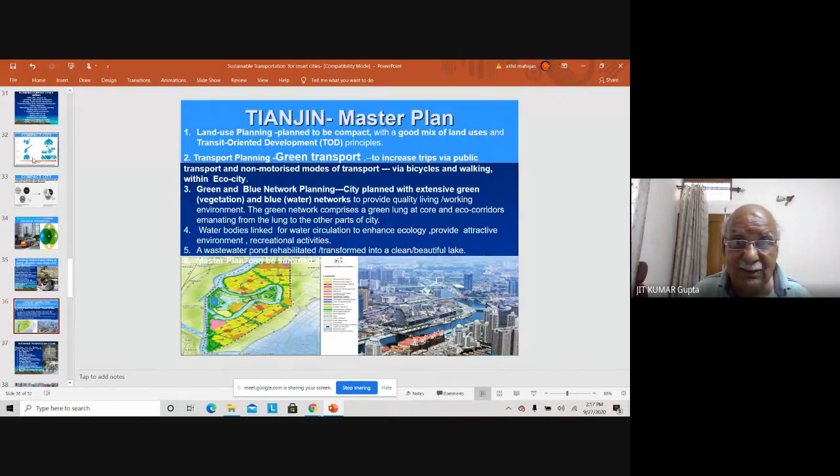But there are options available, and this is Tianjin city, where they again adopted compact city planning. It is a city for 3.5 lakh people spread over 30 square kilometers, and they use the mechanism of mixed land use, transit oriented development, and green transport in order to make mobility sustainable.

Cycling has been talked about. I think cycling, which was invented in the 19th century, remains one of the finest modes of travel over shorter distances, because it is inexpensive, flexible, environmental friendly. It minimizes air and noise pollution, it's a zero energy vehicle and makes you healthy. It has the least financial cost to user and society. It's a win-win situation for the cities, for the people, and for the community and the nation. Already there are 1 billion cycles being used, and all developed countries are now ultimately using cycling as a mode of travel rather than cars.

And you can see, this offers enormous opportunity—there are express cycleways created, which you can use for promoting cycling.

Cycles have dedicated things, and in major campuses like universities which have a huge number of students, like 20,000, 15,000, and all hospitals, they should all stop people using vehicles inside. In fact, all these institutions should be planned for pedestrianization inside, and they can only allow the vehicles to come outside. So there are a number of things cycling can do.

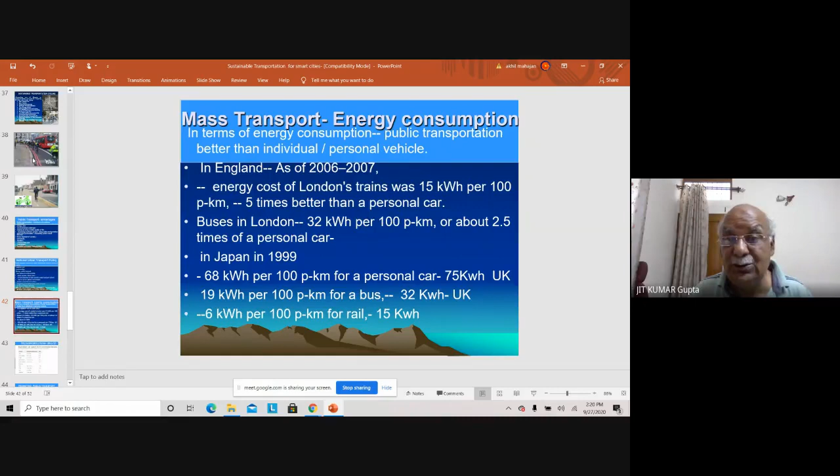You can see the amount of energy you save, and how much you carry. And ultimately, you see what is the road space there is between a car and a bus. If a car has 1 ECS, the bus will require 3.9 times more space, but a bus will be carrying 20 times more passengers than what a car is.

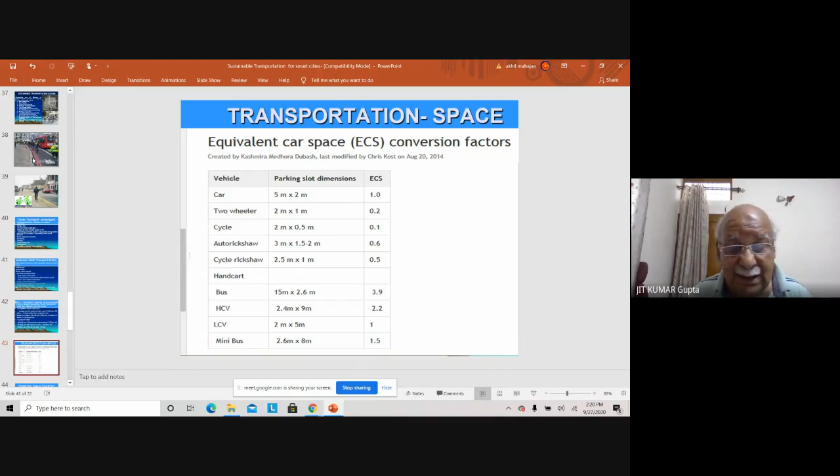So therefore, I think decongesting roads would be one of the critical areas, and public transport would remain very, very important. This has been clearly demonstrated by cities like Singapore and Delhi itself, how mass transportation has done a wonderful job in saving the time of the people, removing 8-9 lakh cars off the road, saving 10,000 crores, and saving 32 minutes of travel time for everybody. That's what they have done.

In Istanbul, 42 kilometers of road lane was dedicated only for buses, and they were able to move 6 lakh 20,000 passengers every day. This is Ahmedabad, Janmarg, they have done it. This is Curitiba, the man who invented the bus rapid transit system, which is now being made applicable over this.

This is Amsterdam, where you can see those trams. They are so friendly. They are using the same road where you use for pedestrian, where you use the vehicle. So they can coexist there, and they have a high degree of efficiency which can be used.

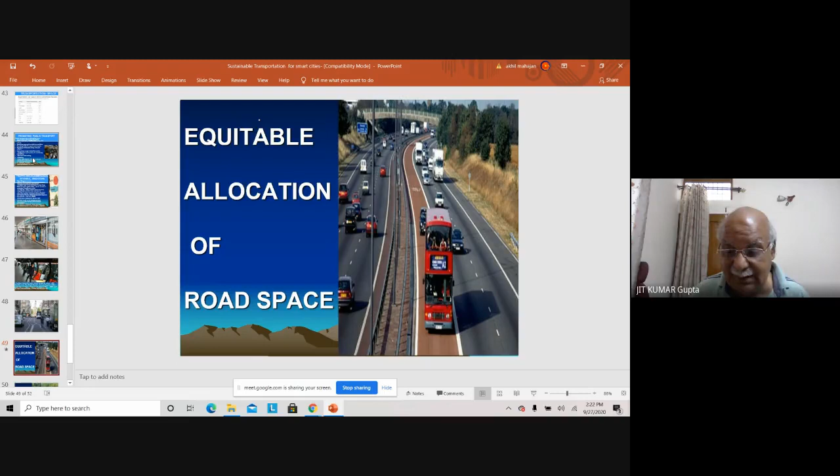So I think the method remains ultimately that we have to manage the limited space we have got, and that's what needs to be looked at. And I would like to say, the Singapore model, which Madam Adani was talking about, and Ali was talking about, I think they have done a wonderful job. I'll take 2 minutes before I close to explain the system, what they did.

In Singapore, you cannot own a private vehicle. Before you own a private vehicle, you have to have a certificate of entitlement, COE, which is sold by the government, and you bid for that. You may pay money for that. So that means you are not at liberty to buy a vehicle and put it on the road, number one. So you have to get the COE, and then you get a car.

Then, the longer you are on the road during congested times, you will have to pay road user charges. That's the ERP, their system, electronic road pricing. That means you have a sticker there, and you are immediately tracked the moment you come on the road, and it goes on matching, and then you have to pay money for using the road.

Thirdly, in Singapore, a vehicle cannot be on the roads for more than 15 years. After 15 years, you have to throw it out, meaning all old vehicles have to go. Then Singapore said that we have already given 19% of the city area for roads and for parking, and we cannot afford more areas. So accordingly, the addition of new vehicles is not being allowed; they are only allowing vehicles that are now more than 15 years old to be replaced.